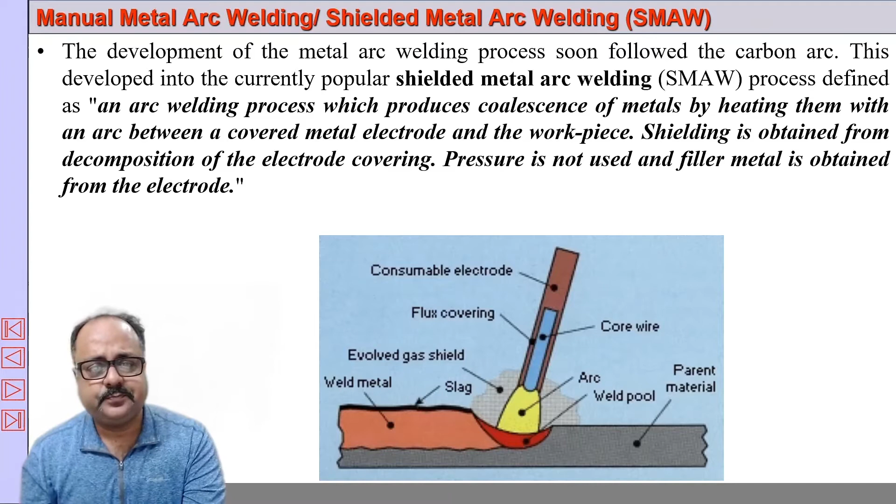So basically it's one of the oldest and most widely used arc welding processes, and it is normally suitable for the range of 3 mm to around 19 mm thickness. Metal pieces can be easily joined, and the arc welding electrode length normally varies from 225 mm to around 450 mm. 450 mm length is more common.

And we widely use it, and the diameter varies from 2.5 mm to around 6, not 9.5, that is mistaken, it is around 6.5, something like that. So from 2.5 to 6.5 is readily available in the market; more than that may be available, but readily available is from 2.5 to around 6.5.

So here it is a consumable electrode. I repeat, shielded metal arc welding uses a consumable electrode which gets consumed by the heat. Let me put it in this manner: the arc produces the heat, the arc is produced by the same electrode, and the arc is used to melt the electrode core wire, and that molten metal is deposited between the metal pieces to form a weld continuity.

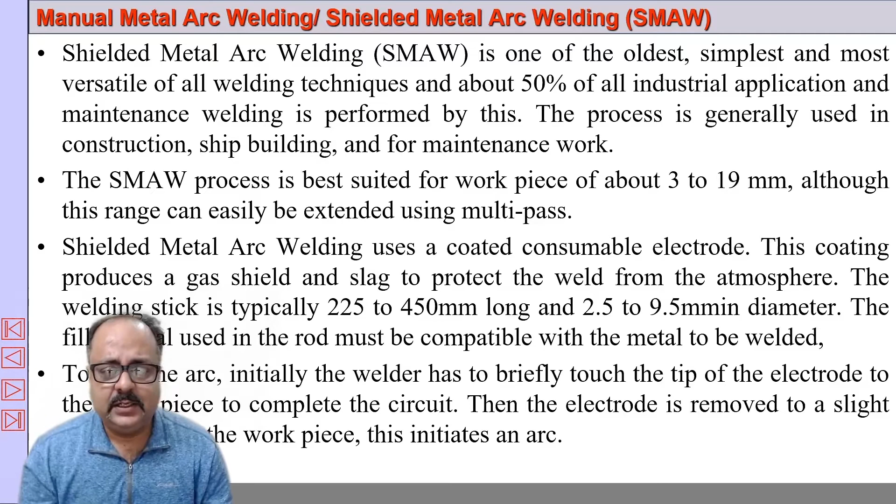And again, you can go for touch start. There is no issue in touch start to initiate the arc. Touch start method is used to initiate the arc, and normally the voltage varies from 15 to 45 and the current varies from 30 to 300. 300 is extremely high actually. Normally it varies from 200 to 250. In India mostly the welding machines are available in the range of 200 or 250 amperes. And as I have said, the welding electrode diameter varies from 2.5 to around 6.5.

So the coating is very important in this type of welding process because this provides a shielding. And this is very important: the coating contains flux. This flux reacts with the impurities and forms a slag. This slag gets deposited over the top of the weld metal. Now this slag performs several functions. One is that it provides a blanket cover so that the heated metal does not react with atmospheric oxygen. And also it retains the heat and prevents rapid cooling.

And once the metal solidifies, the solidified slag will be removed by chipping hammer. So this is one of the reasons it is difficult to automate, because this slag has to be removed before we go for the second pass. After each pass, the slag has to be removed meticulously, and if you don't, in the next pass slag will be entrapped. That is a defect called slag entrapment. So slag removal is also a problem in this type of welding process.

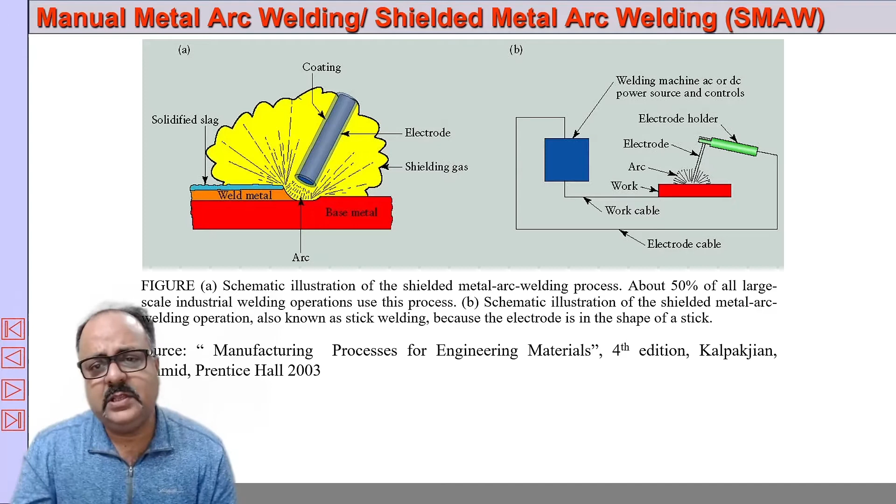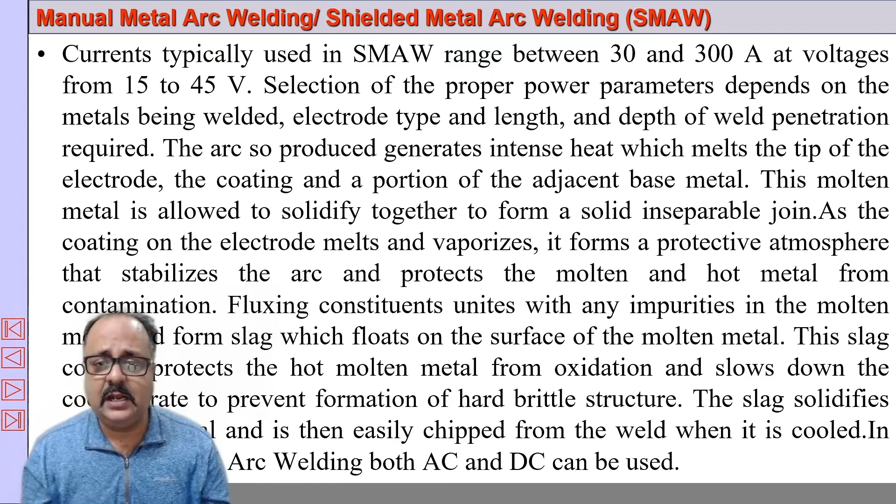Both AC and DC can be used. If you are using AC, a special type of electrode has to be used. Not all electrodes can be used for AC welding, because in AC welding the current is sinusoidal, and during the changeover of polarity it becomes zero. When it becomes zero, to initiate the arc you require low ionization potential material in the electrode coating, and therefore the electrodes used will have low ionization potential coating material for arc sustenance. So not all electrodes can be used for AC welding.

Now this is very important to us. If you are studying shielded metal arc welding, there is a numbering system for mild steel designation by the American Welding Society. First, E stands for electrode, and the next 2 numbers are for the tensile strength. This number is for the positions, whether it is capable of overhead or flat welding only. And 0 or the other numbers indicate the type of coating that is used in this particular electrode.

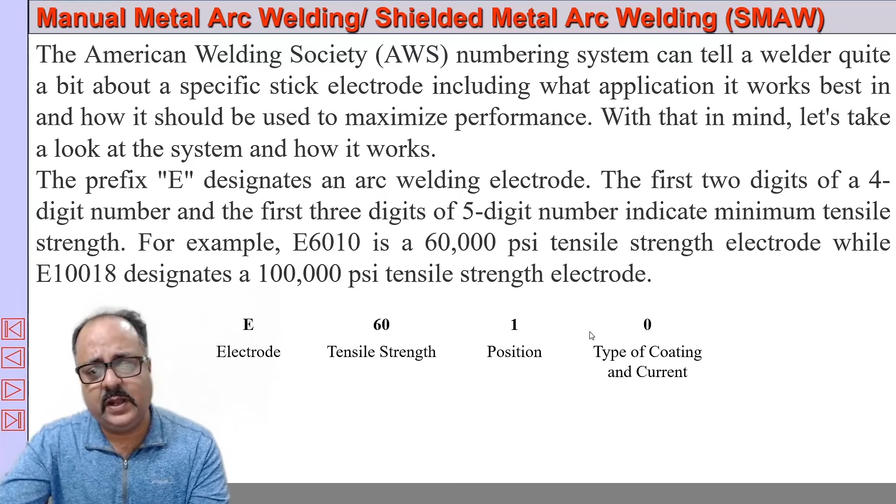So E6010 is one such type of electrode that is available in the market. It can be 6010 or 6011 or 7018, something like that. These digits here indicate the coating. The coating can be high cellulose sodium, high cellulose potassium. So depending on that we choose what type of current we are using, AC or DC.

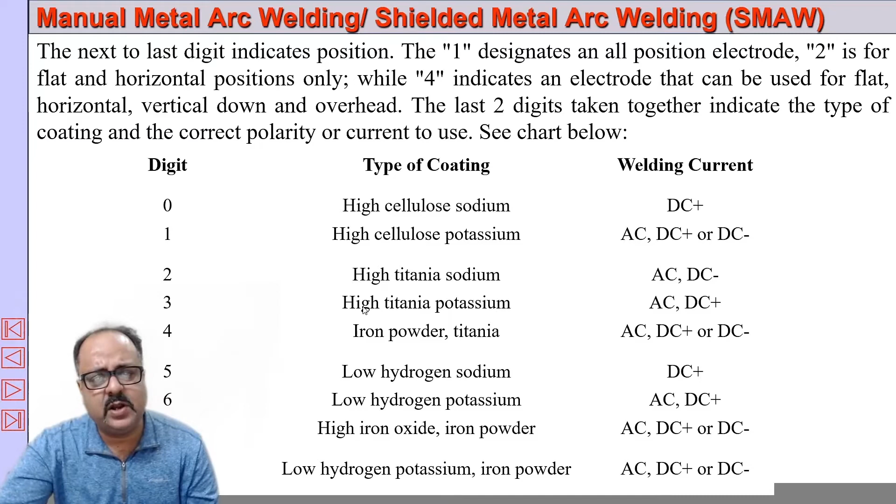So this 3 is important to us because it contains high titania potassium. This 3 can be used for reverse polarity and straight polarity, as well as for AC. So normally in India we use E6013 in abundance. But the problem is that it gives shallow penetration. So if you are using AC welding and you want deep penetration, you should be using 6011. That gives much more penetration.

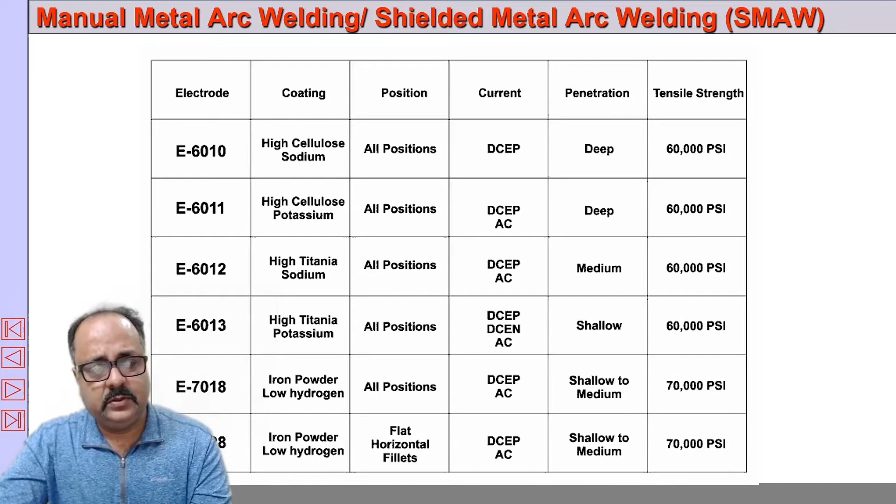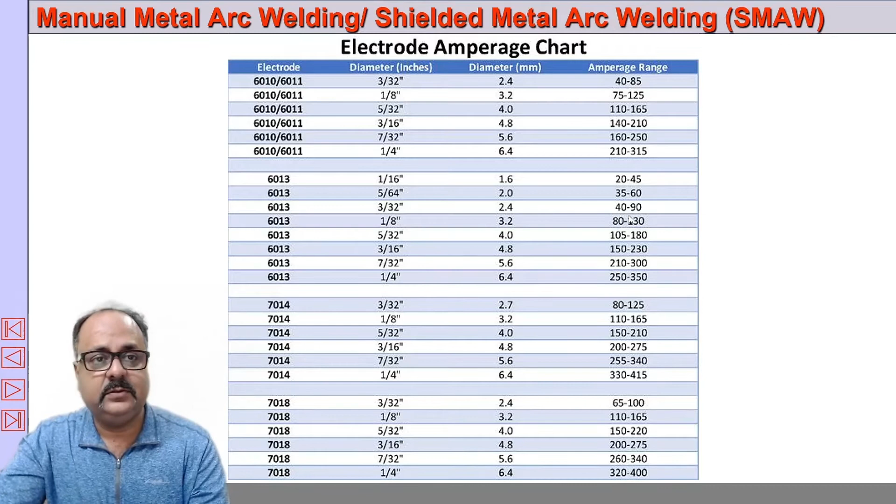So if you are using, let's say, a 4 mm diameter electrode, your amperage setting should be in between this. So for 6011, for 6013, normally we use this, and 2 mm or 2.4 mm, if it's this or this, we normally use. So normally our current range is from 90, 80, somewhat like that. Okay, so we limit ourselves to this mostly. So this is an important chart for shielded metal arc welding welders.

And selection of correct size of the welding electrode will depend on the thickness of the plate. So thickness of the plate determines the electrode you are selecting. So if your thickness is between 1.5 to 2 mm, you can complete it in a single pass using a 2.5 mm electrode diameter. If it is more, then multiple passes will be required, and you can use 3.2 for this range. For this range you can use 4 mm, and for more than 8 mm we will be using 5 mm and multiple passes of the welding process.

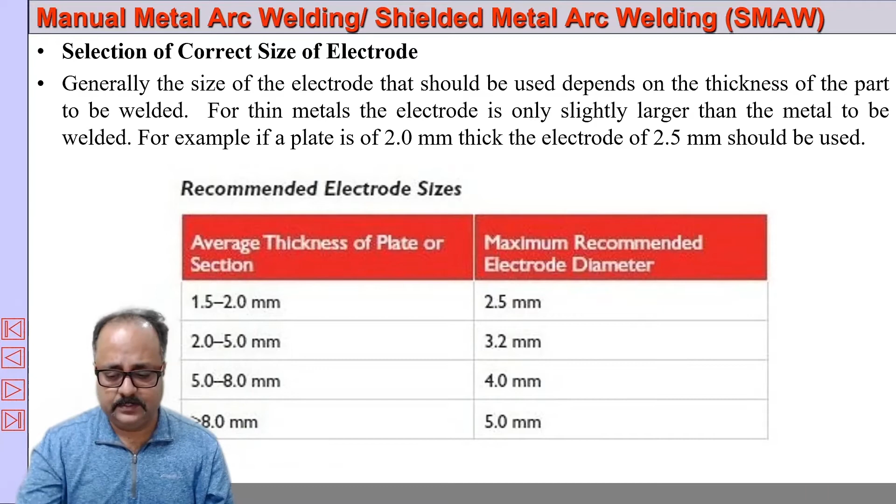So what is hot start? During the starting, the arc initiation sometimes may cause problems because of the moisture present, the impurities present, or damp conditions. So in hot start mode, we will be spiking the current momentarily. Let's say if you keep it 50% hot start, and your current setting is 80, it will momentarily give a current of 120. Then again everything will be settled. So that is called hot start.

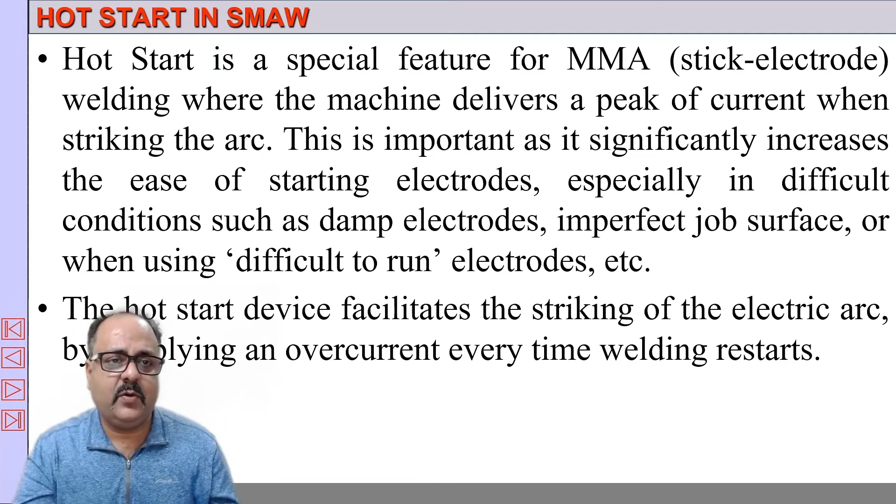So hot start mode facilitates the striking of the electric arc by supplying an overcurrent every time the welder starts the arc. So this is called hot start. It is a very neat feature provided in the modern welding power source. Then we have the anti-stick feature.

If you have done practicals, you might know that every time you do it, it sticks, because doing it manually, maintaining a steady gap is difficult. It is very difficult for the welder to keep a constant gap between the electrode and the workpiece, and sometimes the electrode may come close to the metal surface, and at that time the voltage drops.

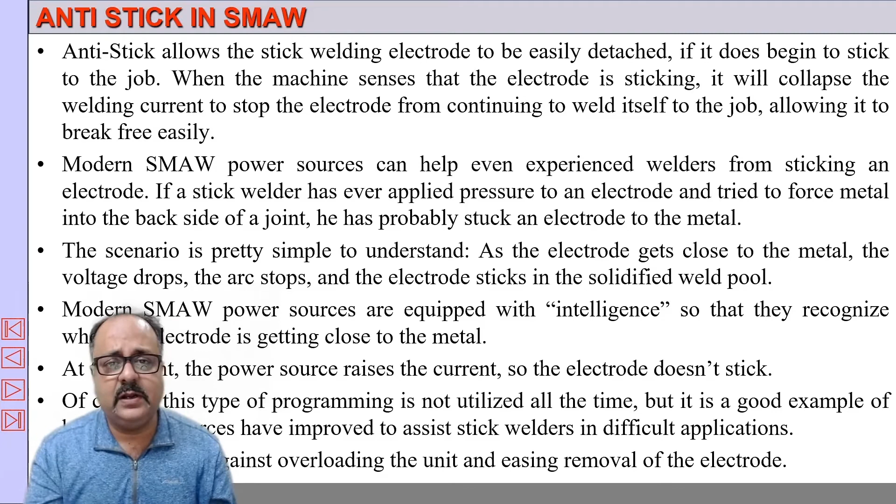So as soon as the voltage drops, the current is decreased. The machine senses that there is a sudden drop in voltage, and because of the drop in voltage it decreases the current or makes it zero, so that the electrode does not stick to the workpiece. This feature is called the anti-stick feature in modern welding power sources.

Another is the arc force control. It's again another neat feature; this is also sometimes referred to as DIG. Shielded metal arc welding is done with a constant current type machine. That means you set a preset current, let's say around 100 amperes.

So the only variation will be in the arc length, longer or shorter. The voltage gets higher as the arc length gets longer, and as the arc length gets shorter, the voltage decreases. So what happens? It temporarily increases the output current during welding once the arc turns too short. So what happens when the arc becomes short?

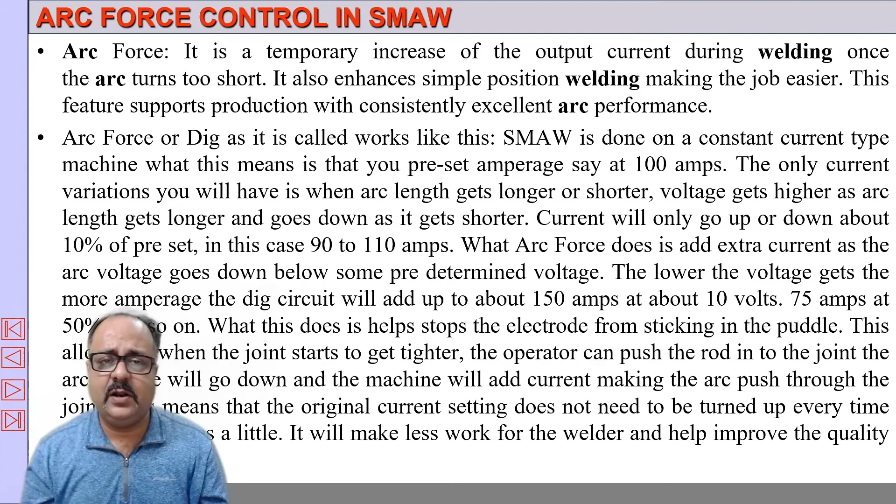The voltage drops, and because of the voltage drop, sometimes there is a freezing of the weld pool. When this weld pool freezes, the stick or the rod may stick to the weld pool, and that condition is avoided by controlling the arc force, where the output current is temporarily increased when the arc becomes short, when the operator by mistake brings the electrode very close to the weld metal pool. So that is again a very neat feature given in modern welding power sources, the arc force control.

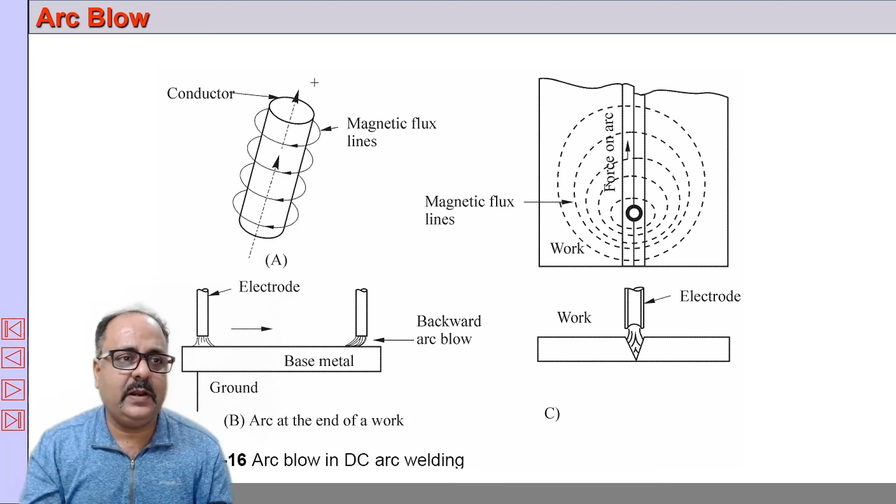So how to tackle this? First, use AC welding. This particularly happens in DC welding, so if you are using AC welding, where the polarity is constantly changing, this is decreased. Another is to reduce the current setting. Once you reduce the current setting, the strength of the magnetic field decreases, so the bad effect of this blow is also decreased.

Use a short arc length so that the filler material is not deflected much. Another thing is to put steel blocks near the end of the plate. That is also another solution. And of course, place more ground leads on the base metal, preferably more than one. So these are the steps to reduce arc blow.

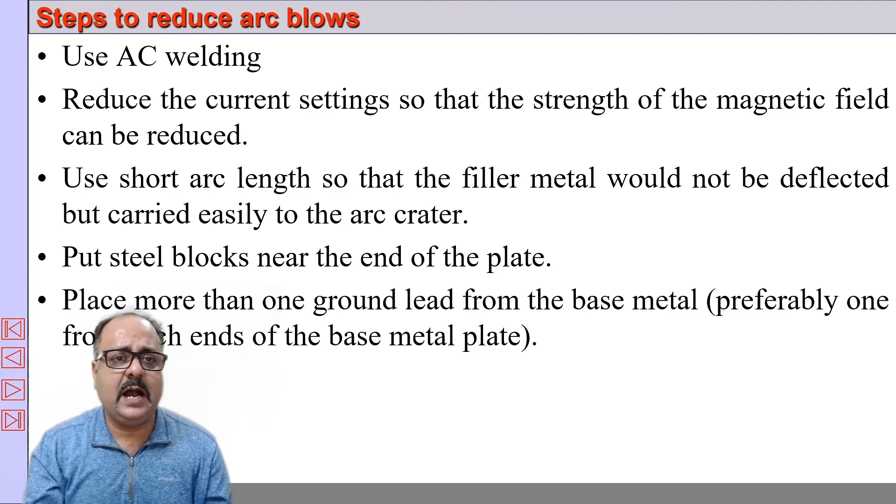So what are the advantages? It is one of the simplest of all arc welding processes. The equipment is portable and less costly. A wide range of metals and alloys can be welded. Thick and thin can be welded, thick up to a certain extent, of course, not very thick. The process finds innumerable applications because of the availability of a wide variety of electrodes. And in cost, it is one of the cheapest types of arc welding setup.

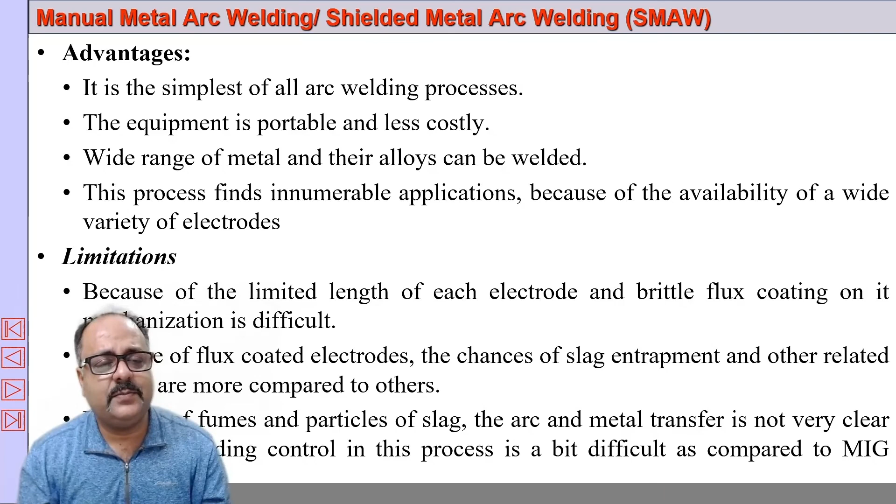Limitations: of course, it is limited by the electrode length, which makes it difficult to automate, and there is a problem of slag entrapment. And there are fumes, and the zone is not properly visible to the welder, which sometimes creates a problem. So these are the limitations and advantages.

Applications include air receivers, tanks, boilers, pressure vessel fabrication, shipbuilding, pipes, bridges, automotive, aircraft; this method is used in so many places. However, in industry this method is rapidly being replaced by the gas metal arc welding process. Thank you for watching this video. I have tried to cover all aspects of shielded metal arc welding.